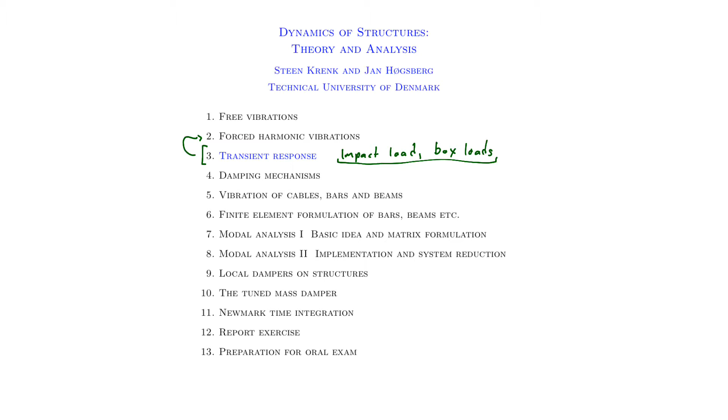The generic transient load is the impulse. So you have a structure, it could be maybe a horizontal bar or beam, and then you snap it by a fast load and it deflects violently and vibrates forth and back, and because the loading P here is very fast with respect to time, it's more or less just an initial velocity.

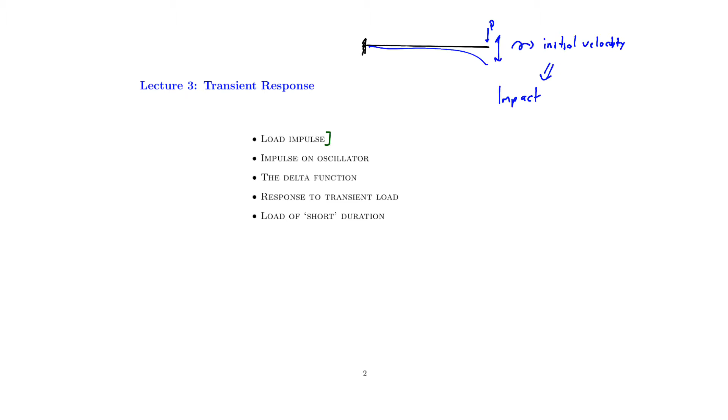So what we are going to consider today is the relation between an initial velocity and this impact. And the idea is, of course, that the conservation of momentum is the key aspect. So once we have decided on how we're going to represent an impulse, we're going to apply it to a structure and see how this vibrating structure will react to a very short and intense load impulse. Mathematically speaking, it can be modeled by a so-called delta function, which is a very particular and very convenient mathematical function that represents the ideal impulse quite well.

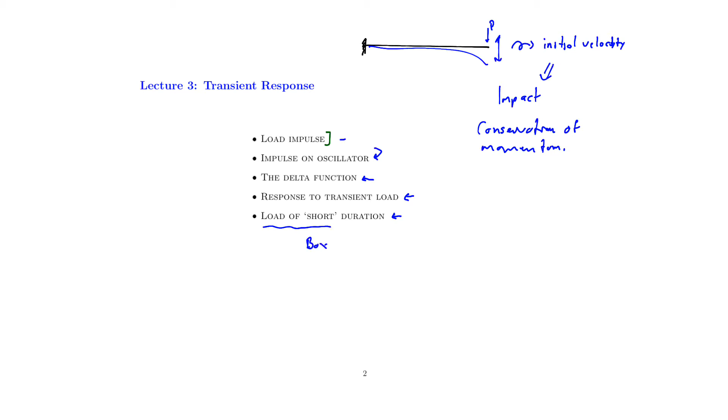And once we have modeled that, it's possible for us to derive the response to this transient load, and also based on a short duration impulse. And we'll have a look at how this short load, which is also often referred to as a box load, will excite the structure. The idea of having a transient response, as we indicate here at the top of the slide, is basically that the response is non-periodic.

So the reason why we look at impacts is that the total response can actually be considered as a superposition or an addition of the response when the non-periodic loading is divided into small pulses, a sequence of pulses. And if we know how to find the response for a single pulse, we can find the total response by simply adding the response for each individual impulse, based on the principle of superposition, which is of course only valid for linear structures. So if you have nonlinearities in your problem, this principle will not be applicable.

So let's dig into the notion of a load impulse or just an impulse. Newton's second law states that the change in momentum is in balance with the force exposed to this particle or mass. So we will consider our typical mass m, then we will expose it to a load F, and this will generate a velocity v in agreement with relation 3:1, where we have that the change in mass times velocity should be equal to the forcing term.

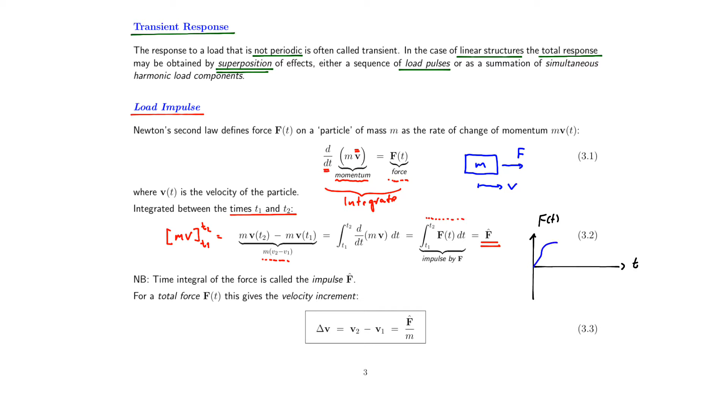Of course, this depends on how the forcing looks, but let's assume that we have, that wasn't very straight, let's do it more accurately. Let's assume that we have time and we want to represent our loading, and we have some kind of impact loading from t1, which is equal to 0, up to t2. So the integral f hat in this case simply represents the area underneath the loading curve within a force-time diagram. And this integral f hat we will simply refer to as the impulse, because it governs the change in momentum from t1 to t2.

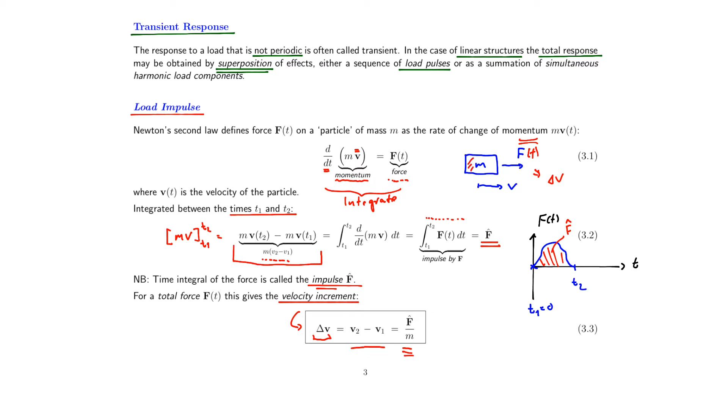If m is known, we can divide by m, and then on the left-hand side we will identify the change in velocity, or simply the velocity increment, given by delta v. And this of course means that over time from t1 to t2, if we have some form of change in f, this will result in a change of velocity of our particle. So we're already on our way to rocket science.

However, let's leave rockets and consider structures instead, because the difference is of course that our structures are at least mostly suspended to the ground by some form of stiffness, and we might even have energy dissipation in the term introduced by the dashpot representing damping.

So for our structure, we do not only have mass, the time derivative of mass times velocity on the left hand side, we will instead have the full left hand side of our equation of motion, not only the first term, but we'll also add a damping term and a stiffness term. And on the right hand side, we apply our loading.

So we'd like today to consider what if this load here is actually initially a short impulse, but in general, what if it's non-periodic? How do we treat the analysis of such a general transient loading on our structure? But let's initially go with the short impulse on our structure, as also indicated in the title of this slide.

So what we do is that we initially integrate over time, according to the procedure we had on the previous slide, and let's again integrate the left-hand side and the right-hand side of a time integral from t1 to t2. So the acceleration term is converted into a velocity term, and it's again represented as the change in velocity from t1 to t2. So it's velocity 2 minus velocity 1.

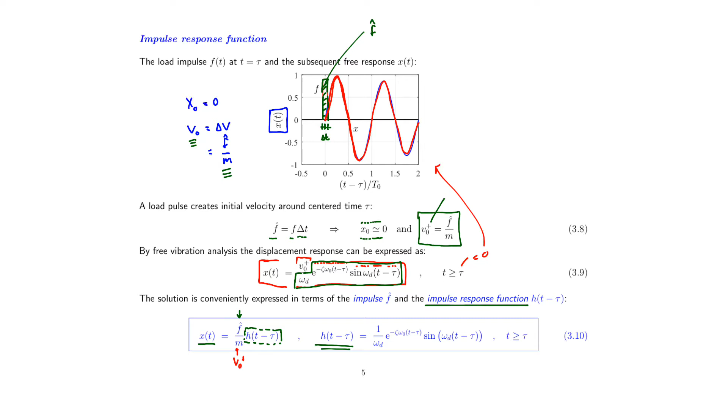If we divide by F tilde over M, and I'm pretty sure I've plotted these functions so that is the case, you could actually write m divided by F tilde in this curve and normalize the x solution this way. So this is actually minus 0 in our case because we initiate tau equal to 0, so it's just the impulse response function with respect to time as shown in this figure.

You can actually use the theory behind impulse response functions not only to replicate the response due to a very short impact, but also to solve general response solutions to general loading conditions. So the idea is that a short duration load can be represented by f hat, that is the integral underneath the loading curve. Let's assume this is what you found for this smooth f curve that you see in the upper right figure. What if you want to represent that by a box load and therefore be able to use the impulse solution that we had on the previous slide?

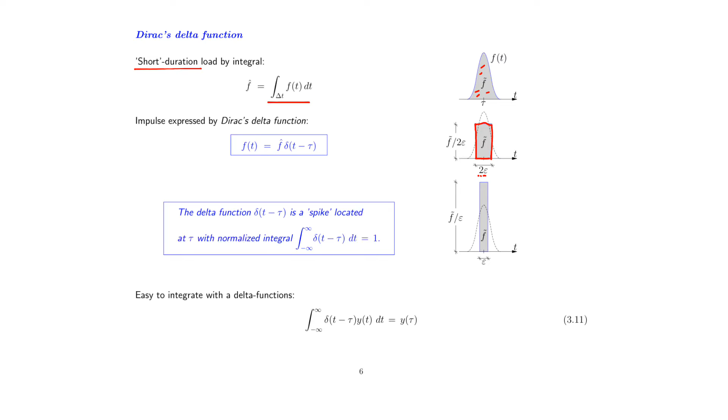The question is, of course, how should you draw this impulse box? Now, in the middle figure, it has some width. Let's call it 2 times epsilon. And to retain the area between these two curves, the height should, of course, be the area f tilde divided by the width 2 epsilon. And that could give us a fairly wide box load as indicated in this figure here. Now, what if we halve the width and double the height? We still have the same area, that's f tilde, but suddenly the impulse becomes much more spiky. And we could continue this exercise.

And at the end, in the limit, we would have an infinitely tall spike, but with a width that is equal to 0. And don't show this to mathematicians, but this infinite times the width 0 should then be equal to f tilde, because the area underneath this curve is the same as in the first figure with the f tilde that we want to represent. And we actually have a name for this very idealized function. We refer to this as a delta. And we have time here, and we spike the function at t equal to tau.

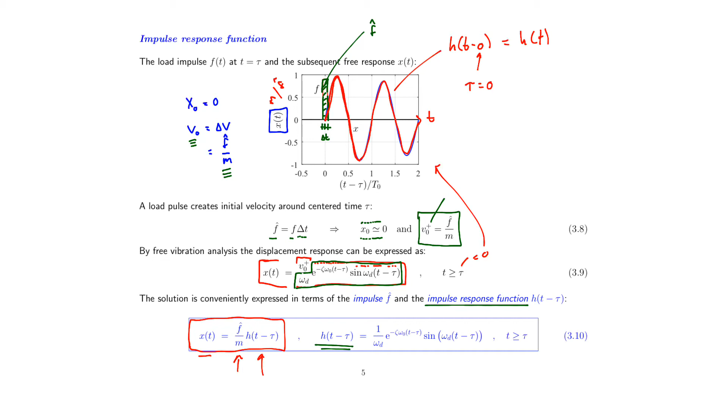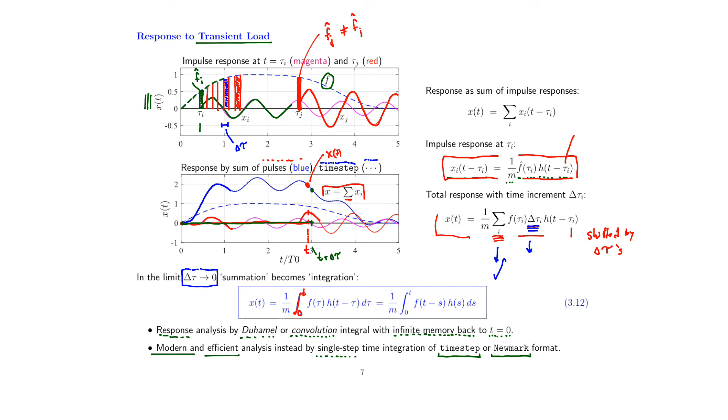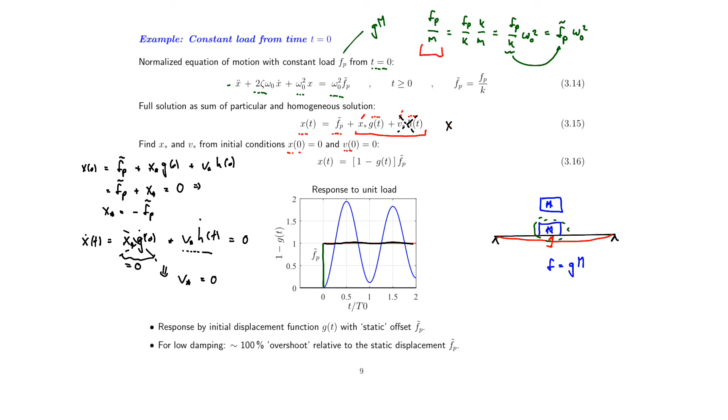So if this term cancels and x star is equal to minus Fp tilde, then we will get this solution in 3.16, which is shown in the figure underneath. So at time equal to 0, when we apply the constant load, we will have an initial increase in the amplitude, get a response that is in the normalized sense here almost equal to 2, and then we will have a damped decaying response centered around the static deflection here, that is Fp tilde. So the vibrations will slowly die out, and at the end we will have a deflection of our structure that corresponds to the case where we very slowly and softly apply the weight on our structure. And that also makes good sense.

But you see the devastating part here, that if you apply the load suddenly at time equal to 0, you almost get a doubling in amplitude. So if you calculate the stresses statically, you should actually multiply them by 2 to be able to represent this almost 100% overshoot relative to the static behavior. And the smaller damping we get, the more we will approach a full 100% overshoot.

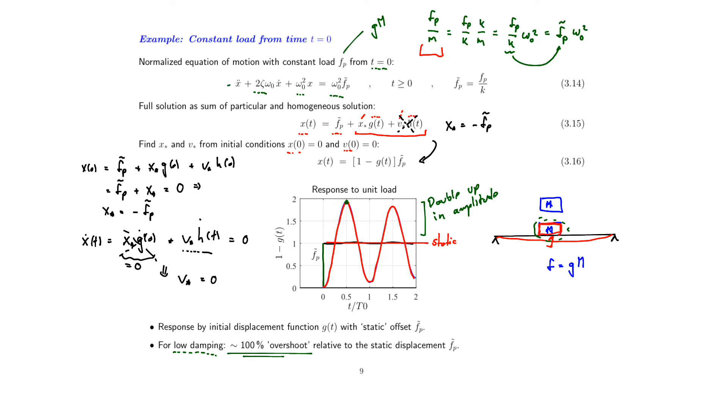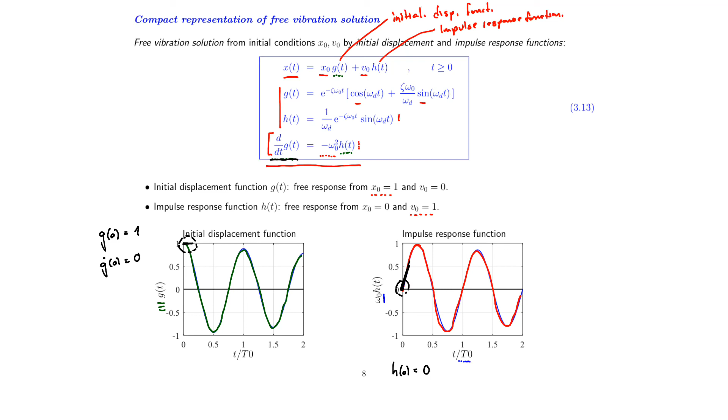And the derivative of g we know, because the derivative of g is equal to minus omega 0 squared times the impulse response function. So we have minus, and then we have minus omega 0 squared times the impulse response function that is centered around our box load, and we'll then have Fp divided by K, and then we'll have Tp.

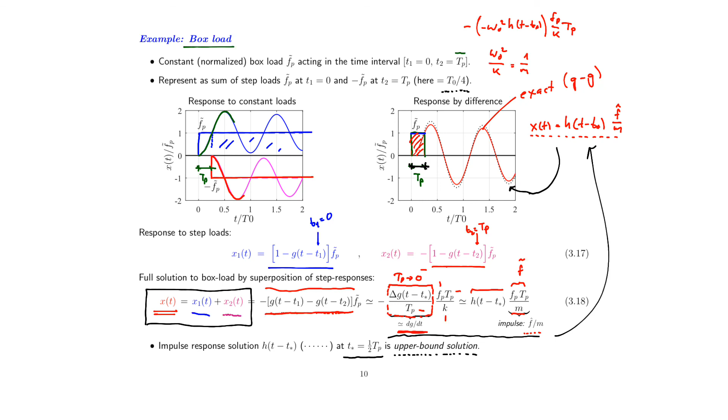So one could definitely argue that the solution using the impulse response function turns out to be an upper-bound solution for our problem with the box load. But the box load can quite easily be solved by simply superposition of shifted solutions for the constant load problem that we had on the previous slide. So, of course, the load duration has an impact on the accuracy. So let's have a look at different load durations, and we're going to use simulations by the time step algorithm to find the exact solution.

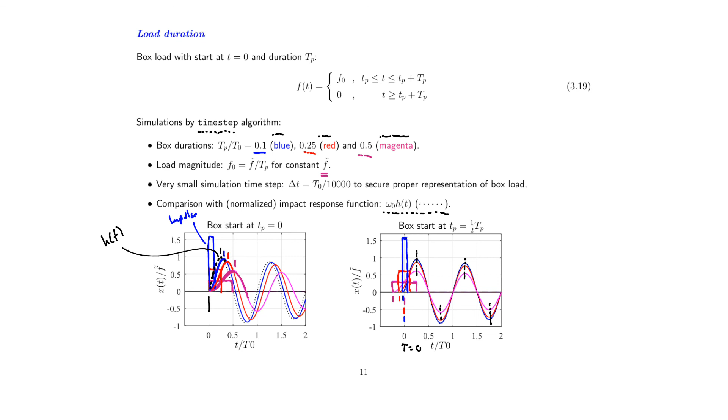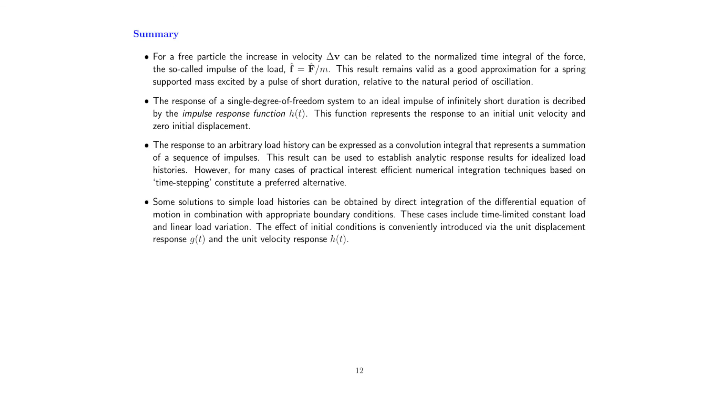This actually finalizes this fairly short lecture on transient loading, and I say short because transient loading is basically everything else than periodic loading, and there are many different types of transient loading. And already for harmonic response, we saw that if we didn't really apply the harmonic load exactly at the resonance, so that we got a nice build-up of amplitude, we had a transient part in the beginning where the response could actually be larger than the response for the subsequent steady state part. And we attributed this initial transient to the beating phenomena of harmonic motion, and in common language, this part will actually represent the transient part.

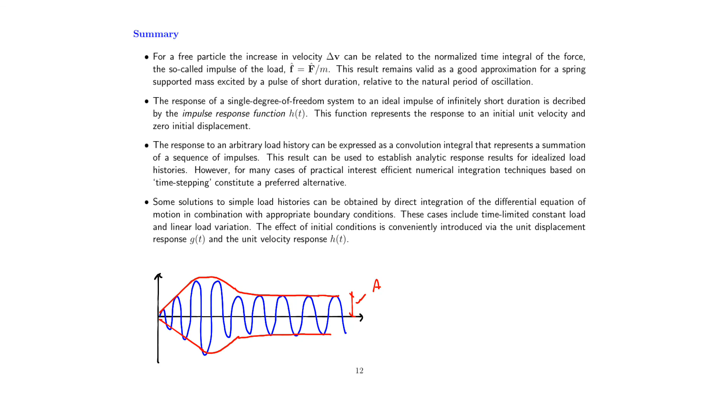So an example is sketched here. We apply harmonic loading, we see this initial part, but because we are not exactly at the resonance frequency, we will have a beating phenomenon here, but then we will move into the steady state amplitude part, where the amplitude is given by the frequency response function, but often this initial part here is actually referred to as the transient part.

So that is the part where the initial conditions are dominant, or the terms containing the initial conditions are still part of the full solution. They all contain a term with a decaying exponential function. So as time progresses, this factor here will of course approach 0, and that means that the part with the constant harmonic amplitude and a period equal to 2 pi divided by the forcing frequency will be the full solution, the steady state part, but the transient part in the beginning actually provides the largest amplitude. So this is for an omega that is not equal to the resonance frequency omega 0.

So there are many things referred to as transient response, transient part. It refers to initial conditions, it contains impact loading, non-periodic loading, box loads, constant loads, and that's why we have only considered a few things within this large umbrella of transient loading.